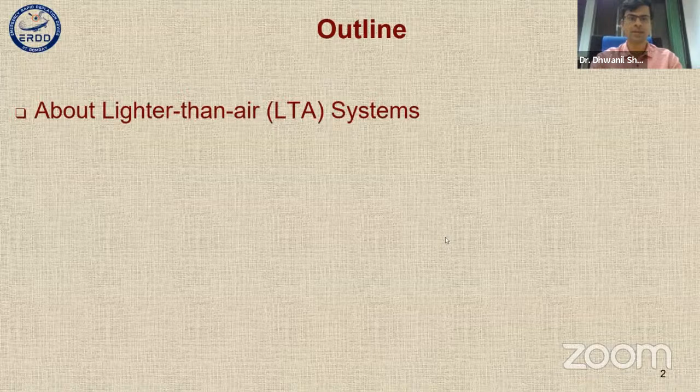This is especially for those who had not attended the previous overview, so I'll give a brief introduction. Just to give a theme of what this competition is about: the outline will cover lighter than air systems, the importance of emergency rapid deflation devices, the problem statement, materials, fabrication, and resources.

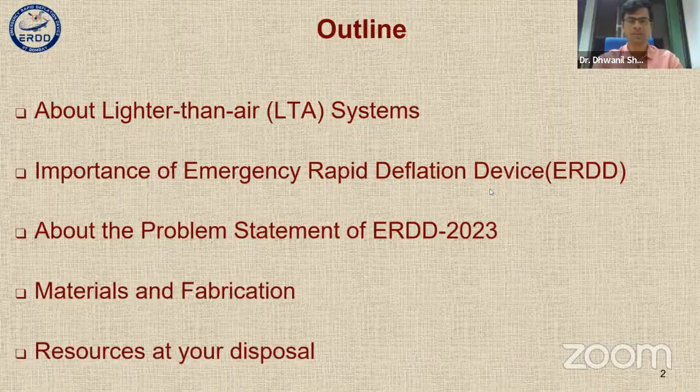Lighter than air systems, as the name suggests - if the whole system is buoyant, or the average density of the system is less than air, then the system stays in the air by itself, without use of any extra energy. This is like kids playing with helium balloons, or hot air balloons for some fun activity.

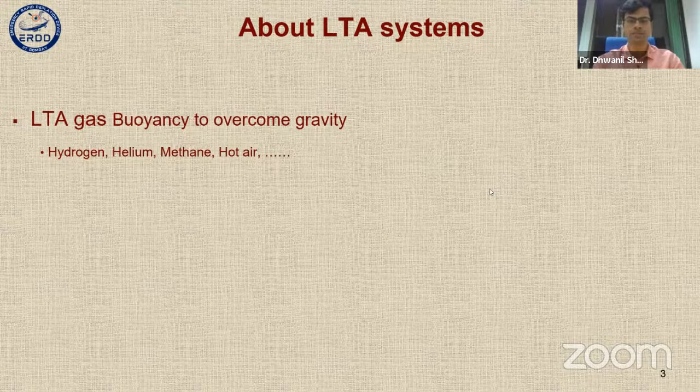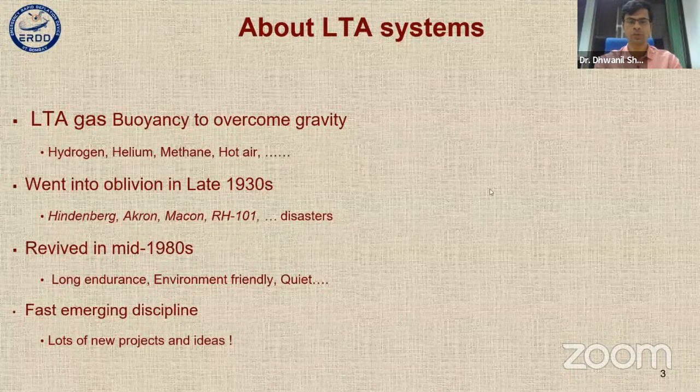This has been around for a while, but in the 1930s, after a few disasters, we saw fewer lighter than air systems. Then it came back in the 1980s because they can be identified as environment friendly, since you do not need to expend a lot of power to stay afloat. It's slowly coming out as one of the major disciplines.

There are a few benefits and some concerns about lighter than air systems. One thing is it's very efficient because you do not need any extra energy for staying there. But on the other side, it's slower and susceptible to weather changes.

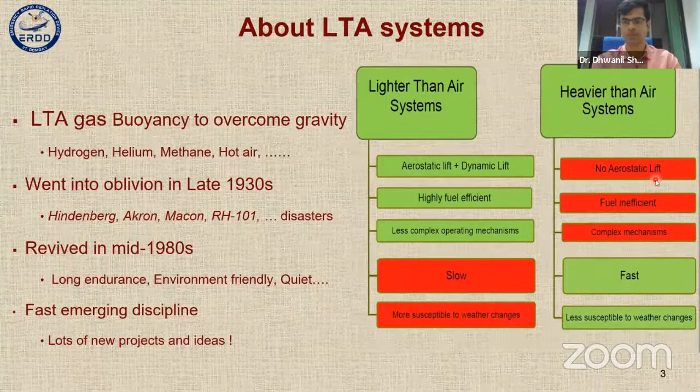On the other side, heavier than air systems like fixed wing aircraft, helicopters, and such rely on aerodynamic lift for flying and need much more power or energy to do so. But they are faster and less susceptible to weather changes.

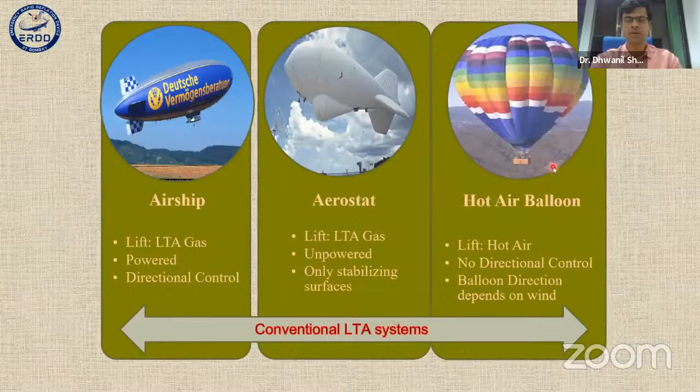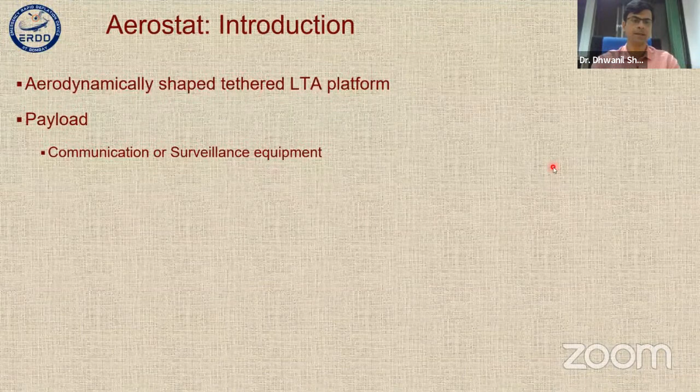The conventional lighter-than-air systems include airships, aerostats, and hot air balloons. Our current concern is going to be on aerostats itself. An aerostat is something that stays static - it's tethered to the ground, has some payload which may be communications or surveillance. It's not expected to go from one point to the other, only expected to hover like a helicopter, but just stay at a place.

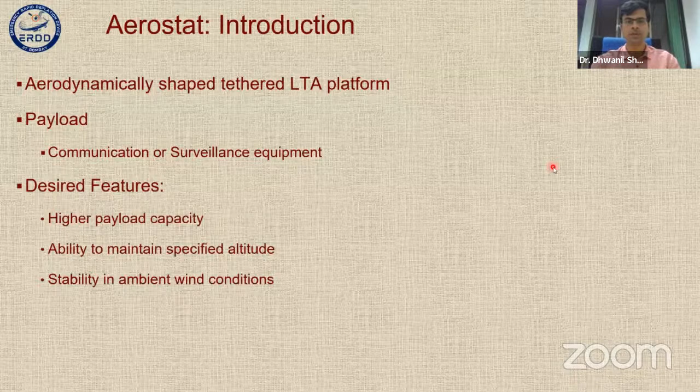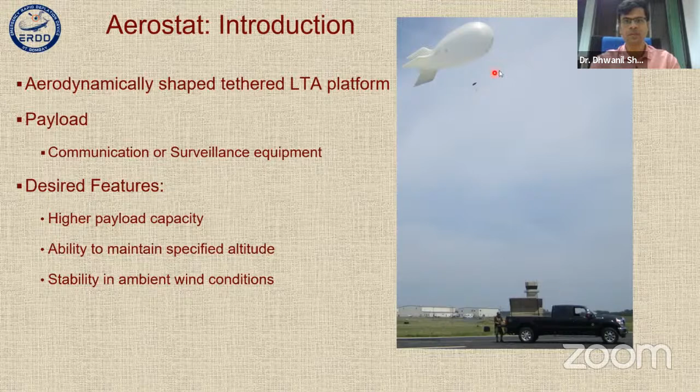Ideally, we would like to have higher payload capacity, we would like it to be at a given altitude, and even if there are some wind gust conditions, we want this aerostat to stay stable. This is one such aerostat system - here on a truck, using a winch, this aerostat has been hoisted. Here are some specifications for the same.

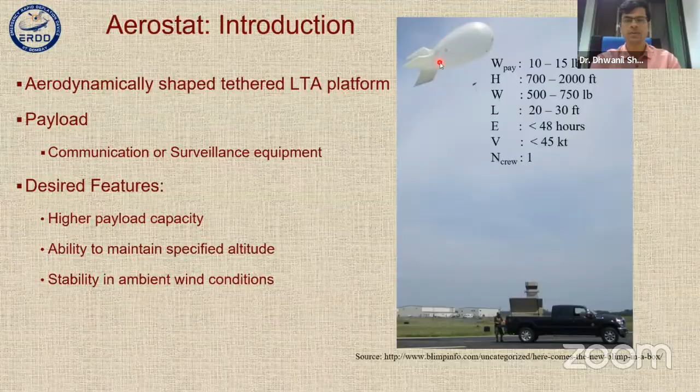So now what is ERDD? ERDD is emergency rapid deflation device. In the previous example, if the tether breaks, the aerostat will just go up in the air and you cannot control it, you cannot retrieve it back. So it is now required by law, and for safety, to have an emergency rapid deflation device or a safety device which brings down the aerostat in a controlled manner.

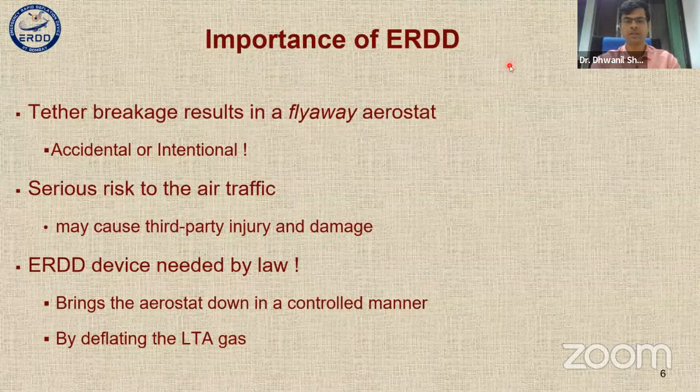If you do not have this, the aerostat may actually go up to an altitude where you have other air traffic, like fixed wing or helicopter traffic. So it could be a very risky operation. This is the motive why ERDD is there, and hence the competition - we are tasked with designing and testing this ERDD system.

So here we have a video of a destructive ERDD test. This is a 5-minute video.

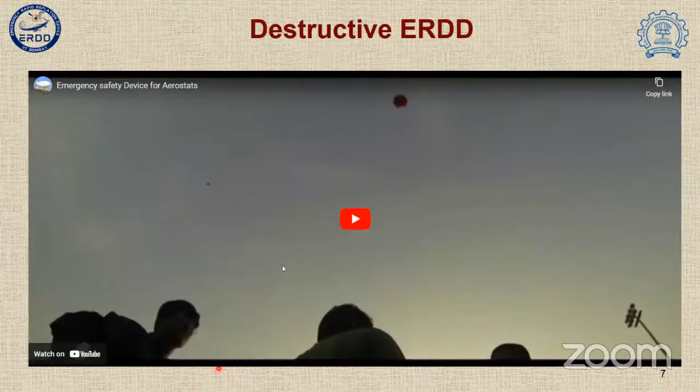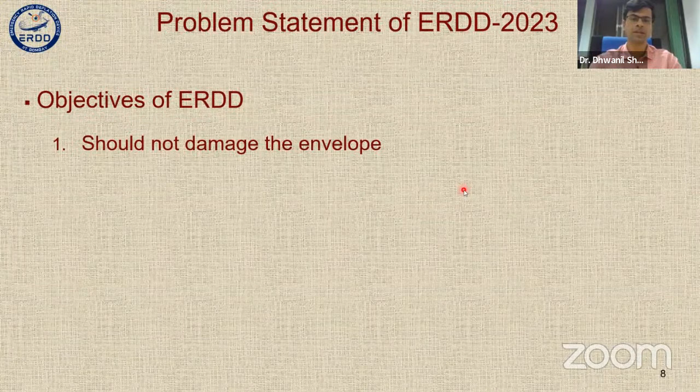So, the problem statement: the ERDD that you develop should not damage the envelope. Yes, you need to come down, but that should be controlled, in a way that you can still reuse the envelope. You also don't want to damage the payload - sometimes the payload could be of very high value, so if you fall like a brick, you will definitely damage it. We need a controlled descent rate, and the impact on the payload should be low.

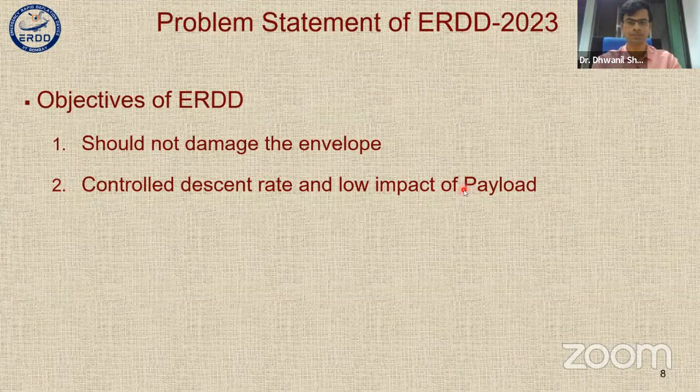You need two modes of operation. One is autonomous detection of tether breakage, which means if the tether breaks, this system should immediately work towards getting the envelope down. The other one is remote command, meaning you want to get the aerostat back to the ground soon, even if this is not due to tether breakage. You just need the aerostat to come down soon.

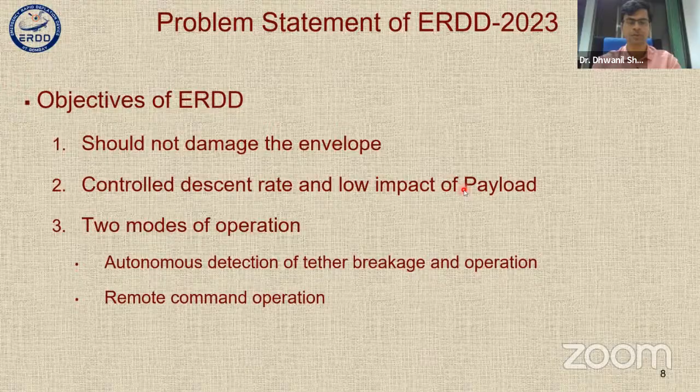So here are some constraints that you need to follow when you design and make your systems. The all-up weight, which means envelope, ERDD and everything that we would be putting on a weighing scale, should not exceed 1.3 kgs.

The pillow envelope, or the amount of volume of gas that we put into your aerostat, will be less than 1.5 meter cube. So you have to design your aerostat or whatever shape you take to hold less than or equal to 1.5 meter cube.

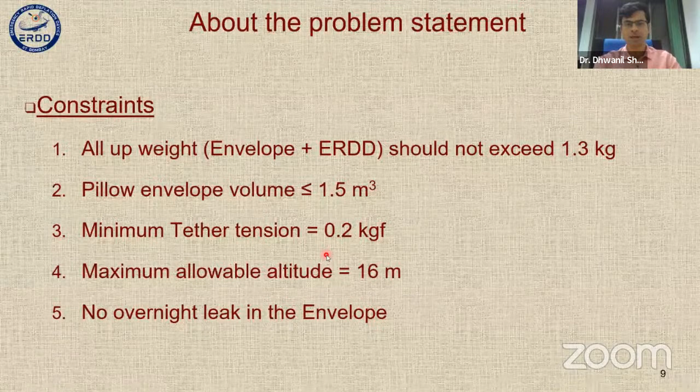Now, when this aerostat or pillow is hoisted using the tether, the minimum tension this tether needs to have is 0.2 kilogram force. If it is less than that, it just means your aerostat is not creating sufficient lift to meet the requirement.

The maximum allowable altitude regards once we cut the tether - this ERDD system has to act in a way that the aerostat does not ascend more than 16 meters, because after that it will touch the ceiling of the corridor.

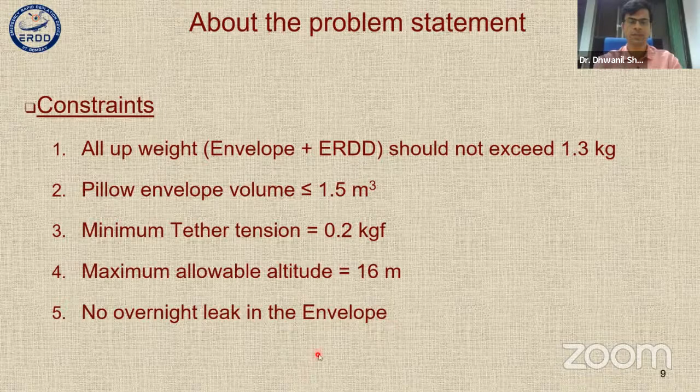And your design has to be such that it is not leaking. So once we fill it on the competition day, or on the first day of the competition, we want it to stay that way without leakage throughout the night. This is important because if you design a safety system which is itself leaky, you would end up wasting a lot of helium, and helium is a very expensive resource. So operationally speaking, one has to create designs that are leak proof.

So there are a few materials that can be used for envelopes: low density polyethylene, metallized polyethylene, and PVC plastics. There are a few fabrication methods you can refer to, and depending on what is available to you, you can choose to use any of these materials and fabrication methods.

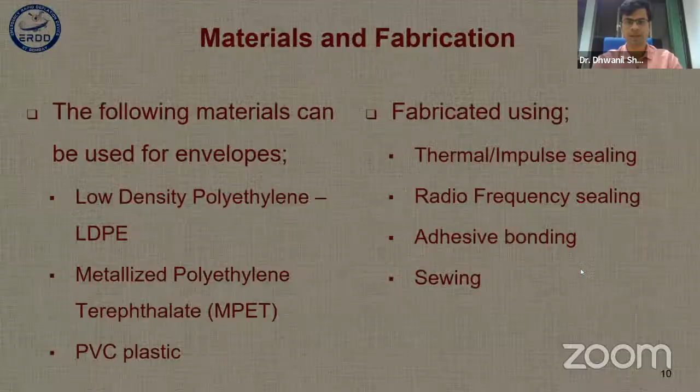So here is a sample image of a pillow envelope. This is one of the simplest things you can create to hold the gas.